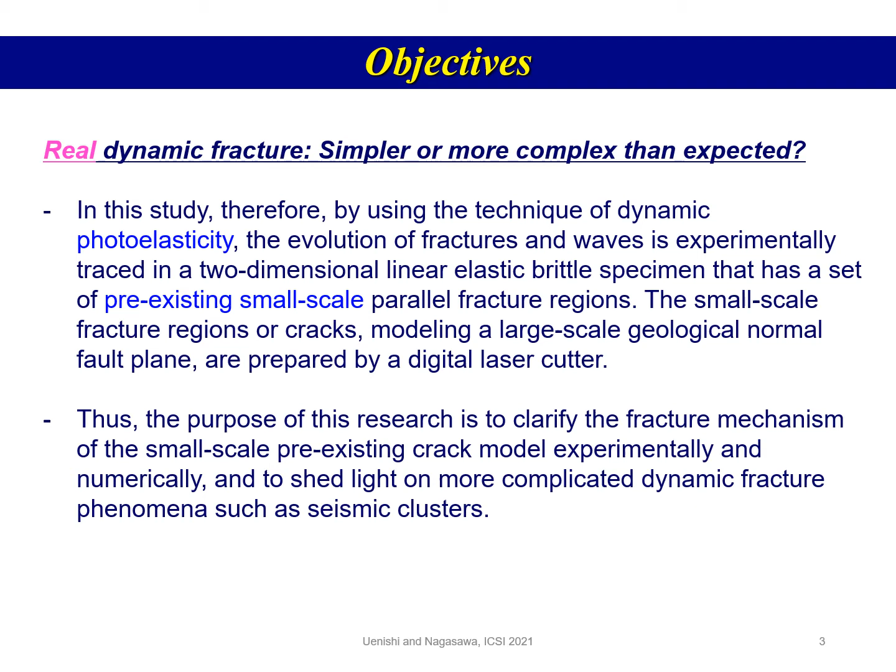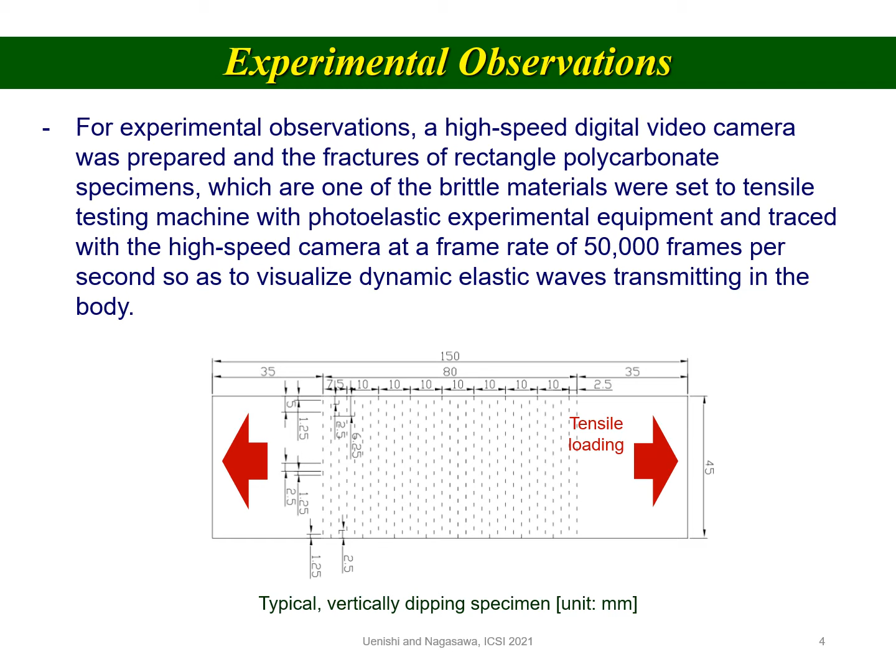For experimental observations, a high-speed digital video camera was prepared and the fractures of rectangular polycarbonate specimens, which are one of the brittle materials, were set to a tensile testing machine with photoelastic experimental equipment and traced with the high-speed camera at a frame rate of 50,000 frames per second so as to visualize dynamic elastic waves transmitting in the body.

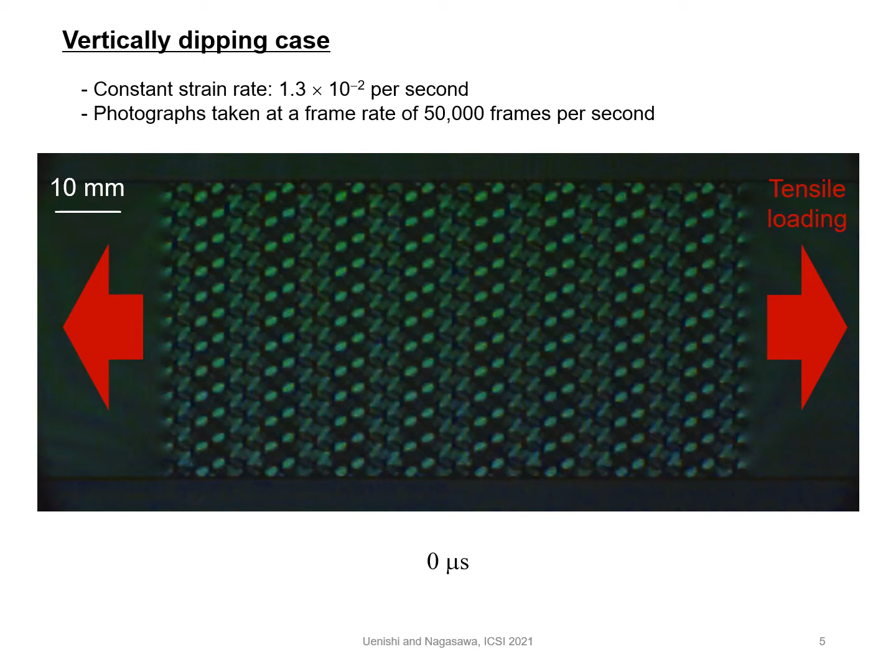In the case of the specimen having pre-existing cracks which are arranged perpendicularly to the tensile direction, first, primary fracture proceeded from the underside to the upper side. Almost at the same time as the initial crack reaches the upper end, secondary fractures were formed in the opposite direction of the initial fracture.

Surprisingly, one of the secondary fractures progressed to some extent, and soon was arrested around the middle of the specimen, pausing for about 200 microseconds. Eventually, the fracture split the specimen totally in half despite no additional static load.

Here, to summarize this fracture propagation event, primary fracture propagated at first, then secondary fracture was generated and progressed with an 200 microsecond short break at the half of the specimen. Finally, the secondary fracture was split without any external loading after the primary fracture propagation.

The secondary fracture is not to be considered as caused by static stress, but by dynamic wave propagation, because this fracture began to develop after the primary fracture had completely broken the specimen.

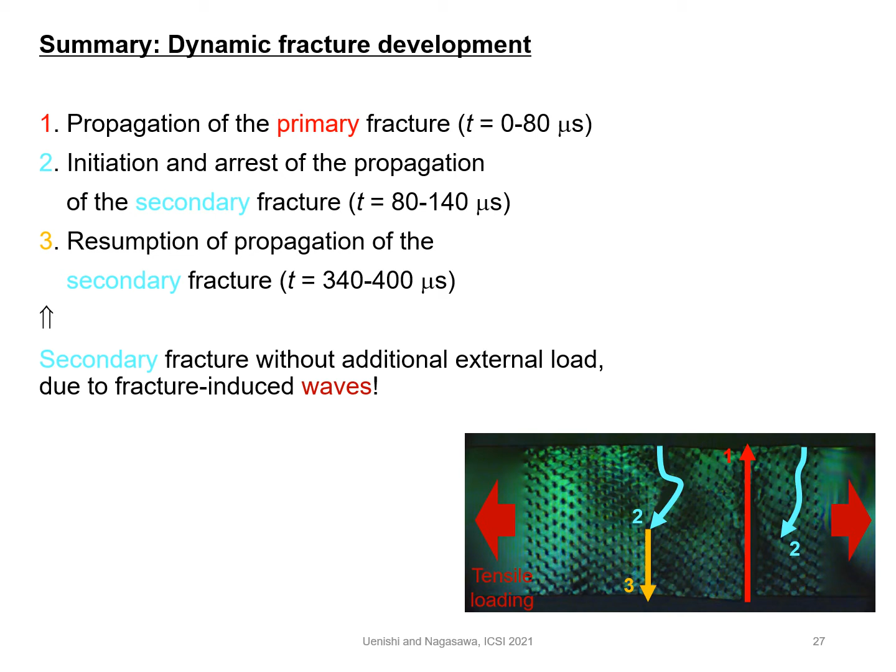This result is supplemented by numerical calculations based on the finite difference method with space-time second-order accuracy, assuming a homogeneous, isotropic, and linear elastic material with mass density 1,200 kg per cubic meter, shear modulus 820 MPa, and Poisson's ratio 0.37. In the calculation, longitudinal, shear, and Rayleigh wave speeds are 1,820 m per second, 827 m per second, and 775 m per second.

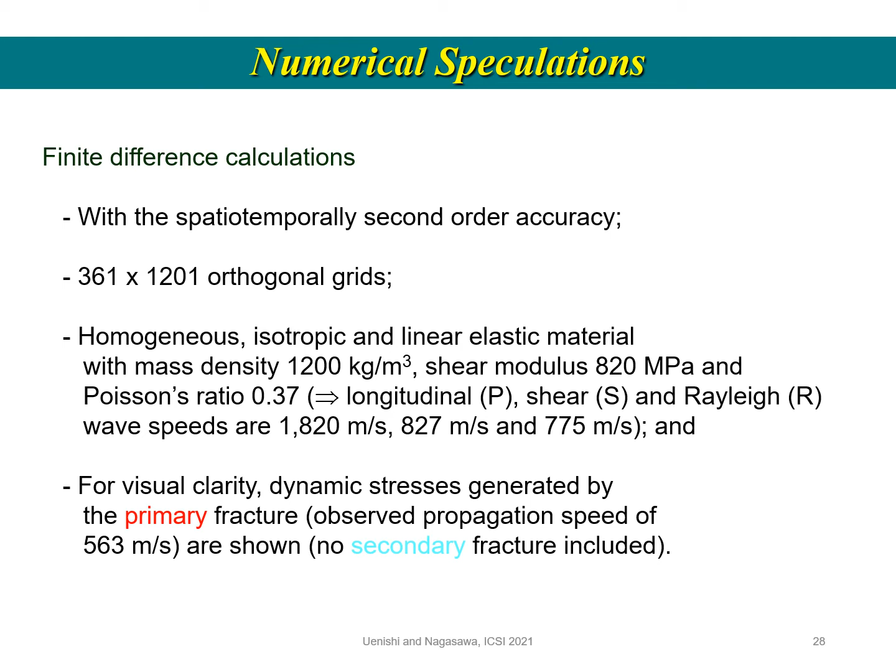For visual clarity, dynamic stresses generated by the primary fracture are shown in the simulation. We can see the fracture propagation, and also the Rayleigh wave front which characterizes dynamic crack propagation can be seen at 40 microseconds. After that, when the dynamic elastic waves reach the opposite boundary, you can see where the stress is concentrated. This is exactly where the secondary fractures were initiated in the former experiment.

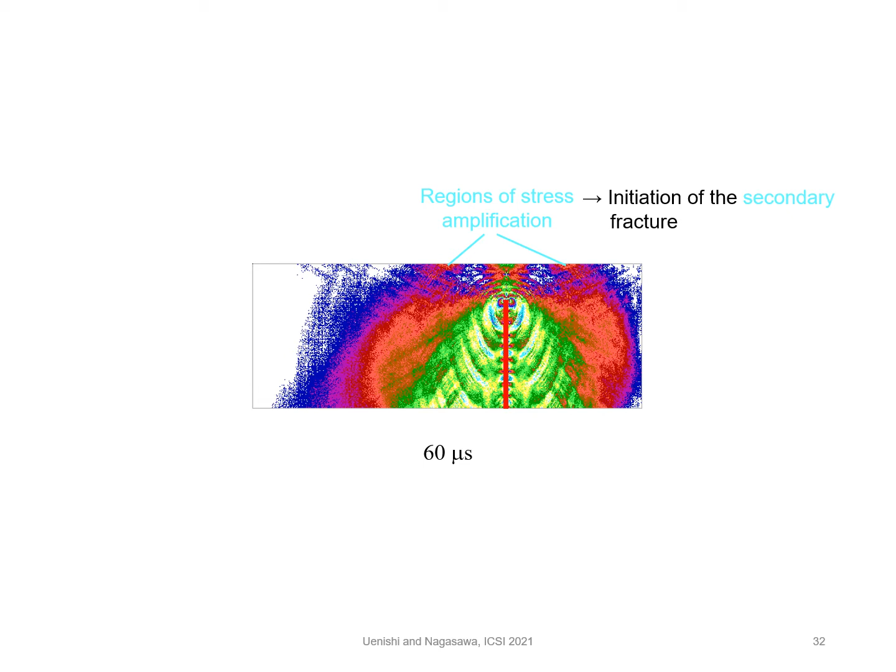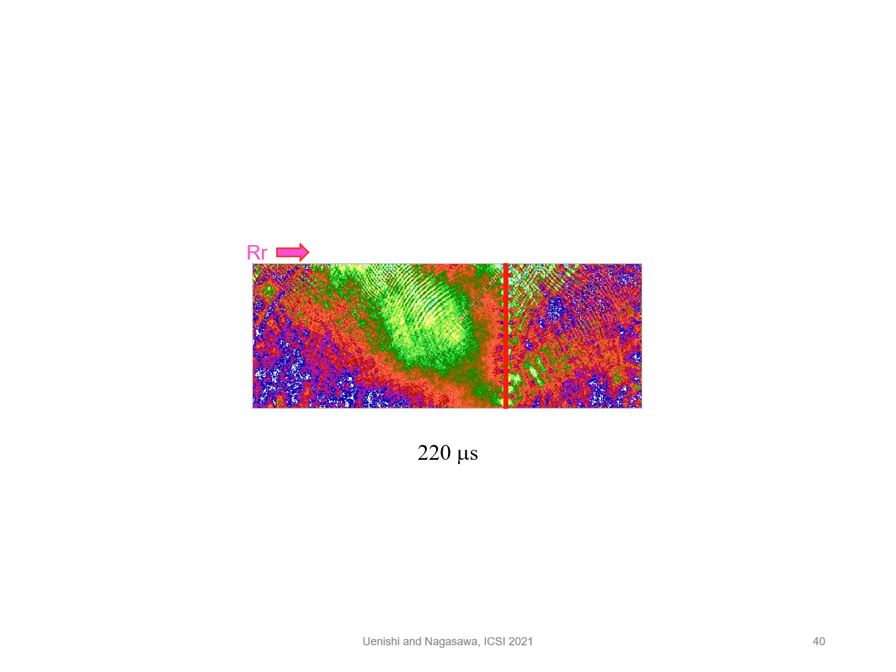Then, the Rayleigh surface wave travels along the free surface of the specimen, is reflected at the edge and then propagates along the secondary fracture region. It can be considered that the secondary fracture repropagation was caused by the reflected Rayleigh wave.

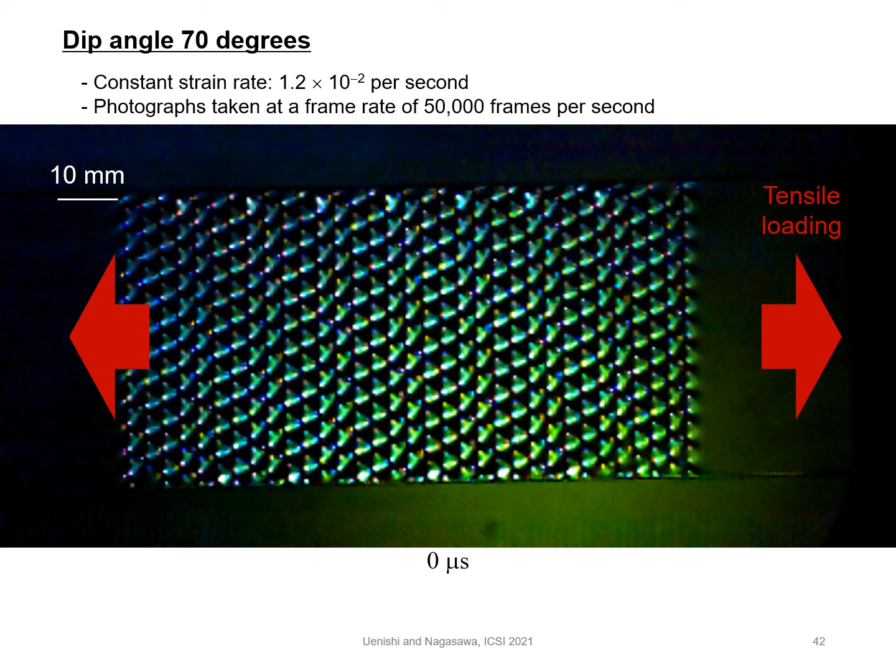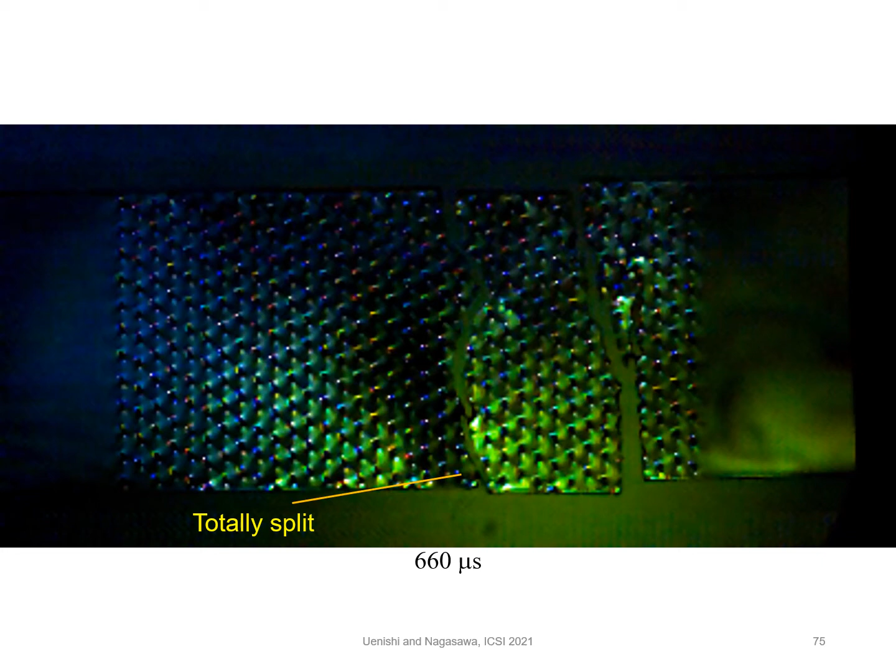First, the primary fracture will develop. Then, secondary fracture occurs like the former experiment. Finally, the fracture propagates and the specimen is split totally. This behavior looks like that of the former vertical dip angle one, but it is slightly more complicated in that the direction of the crack growth is a little curved.

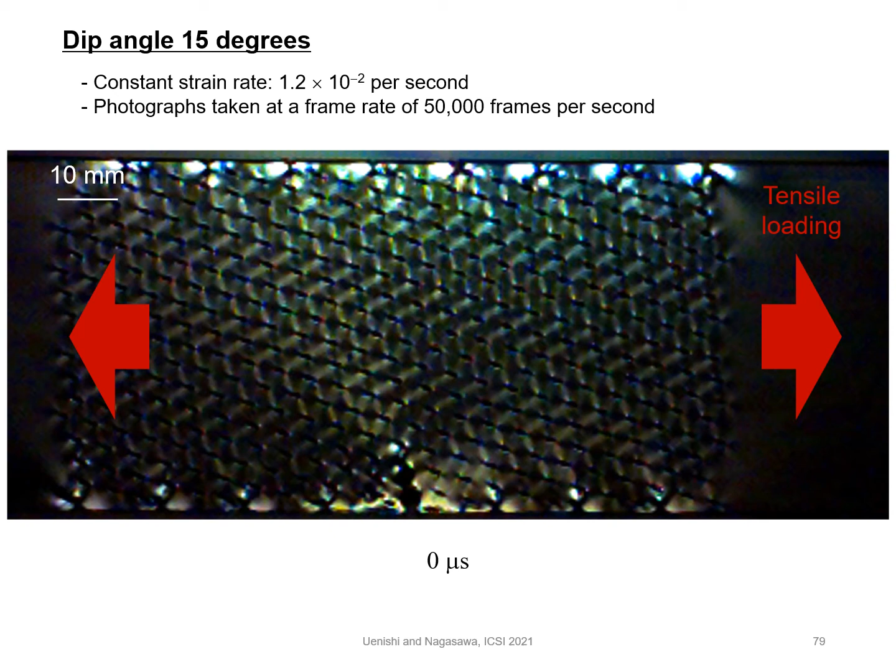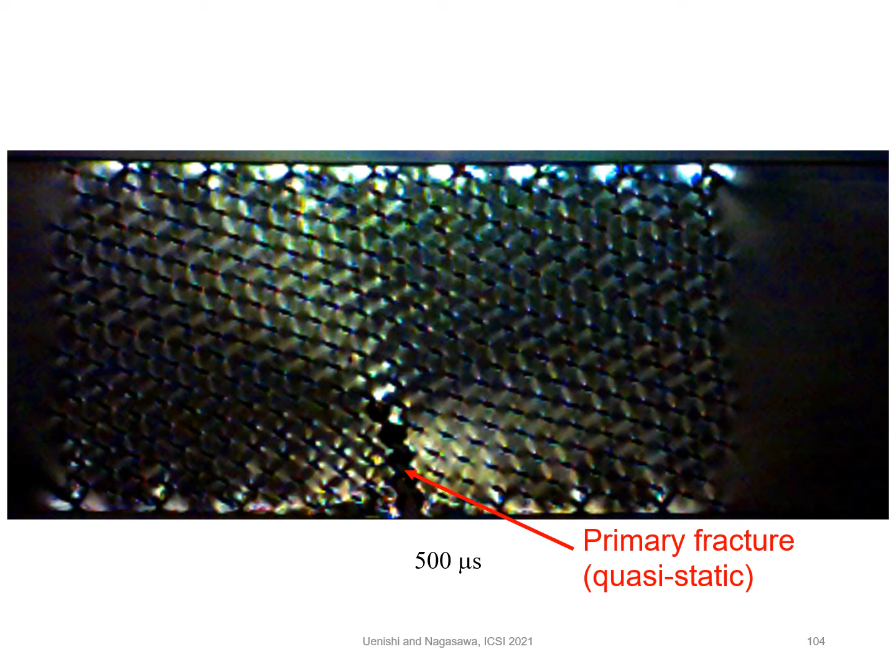Next, I will introduce an example when the dip angle is as small as 15 degrees. Under static loading, the primary fracture grows quasi-statically, connecting the tips of the pre-existing cracks. Contrary to the simplicity of primary crack growth behavior, in this case as well as the experiment presented before, the main fracture stopped before the crack completely split the specimen, and almost at the same time, secondary cracks began to move dynamically.

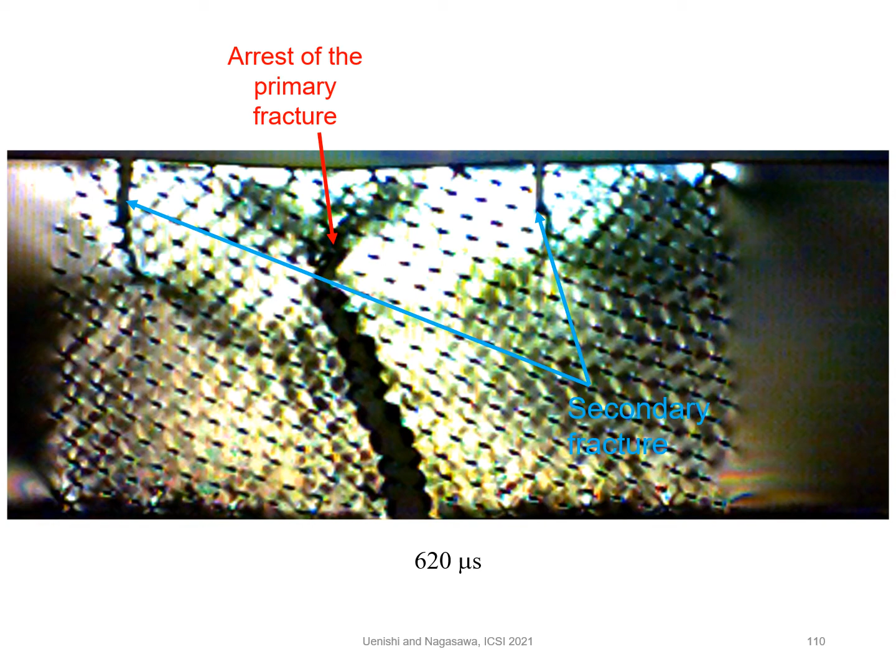In the example shown here, the secondary fractures branched at the end, resulting in the destruction of the entire specimen.

It is concluded that in the case of pre-existing cracks that are more vertically inclined with respect to the quasi-static external load applied by a tensile testing machine, the main fracture is prone to develop dynamically, and then the secondary fractures appeared at space-temporally remote distances from that main fracture. The secondary fracture extends also dynamically into the direction opposite to that of the main fracture.

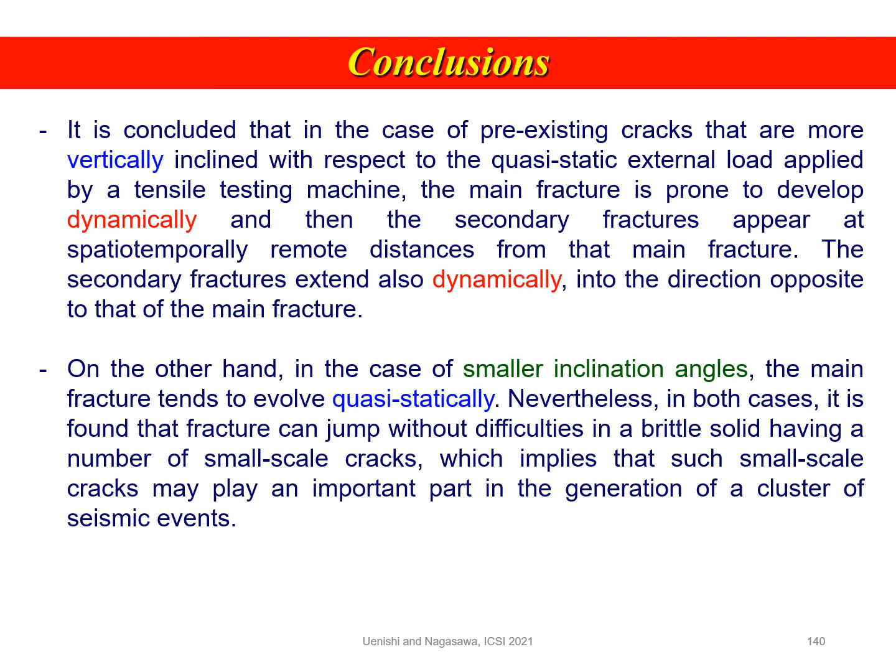On the other hand, in the case of smaller inclination angles, the main fracture tends to evolve quasi-statically. Nevertheless, in both cases, it is found that fracture can jump without difficulties in brittle solids having a number of small-scale cracks, which implies that such small-scale cracks may play an important part in the generation of a cluster of seismic events. Thank you for your kind attention.